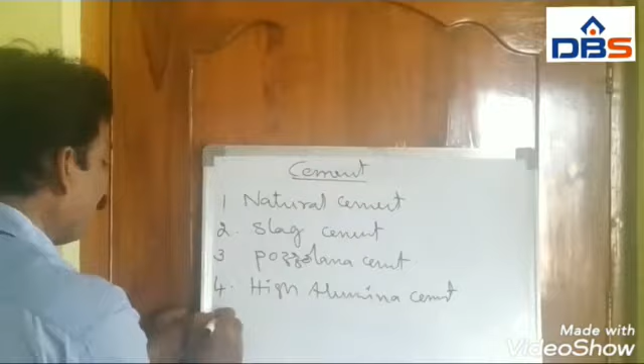One, natural cement. The second one, slag cement. Third, pozzolana cement. Fourth, high alumina cement. And fifth is Portland cement. These are the cement classifications.

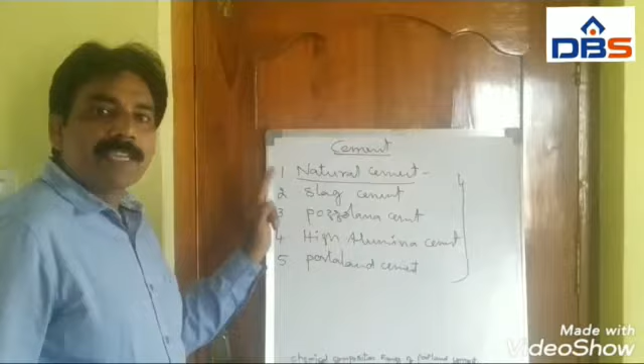First, natural cement. Natural cement is obtained by the furnace from naturally occurring limestone containing 20 to 40% of clay. The mixture is ground to produce natural cement. Natural cement is quick setting and low strength. That is natural cement.

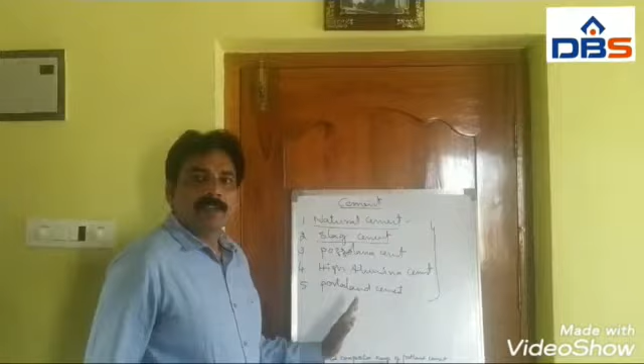Second, slag cement. Slag cement is produced by mixing blast furnace slag and hydrated lime, grinding to powder and mixing a small quantity of gypsum. Slag cement is slow setting and a low strength cement.

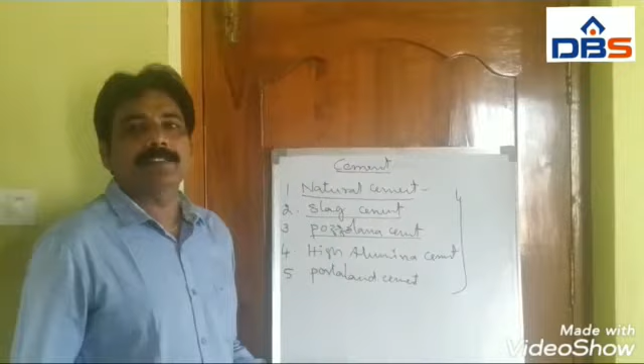Third, pozzolana cement. Pozzolana cement is prepared by mixing pozzolana and limestone and grinding the materials to produce pozzolana cement. Pozzolana cement is also slow setting and has the highest strength.

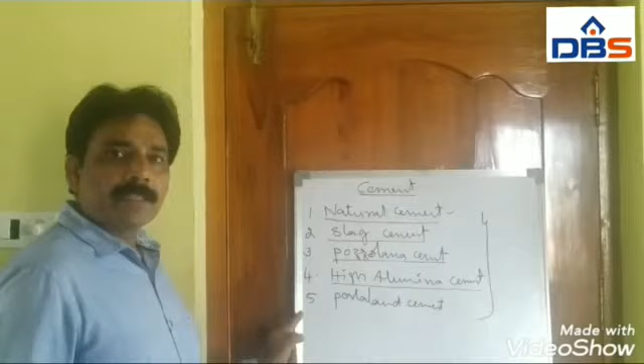Next, high alumina cement. High alumina cement is mainly calcium aluminates. It is prepared in a blast furnace by mixing limestone and bauxite at 1500 to 1600 degrees centigrade to produce a ground powder, mixed with 2 or 3% gypsum, called high alumina cement.

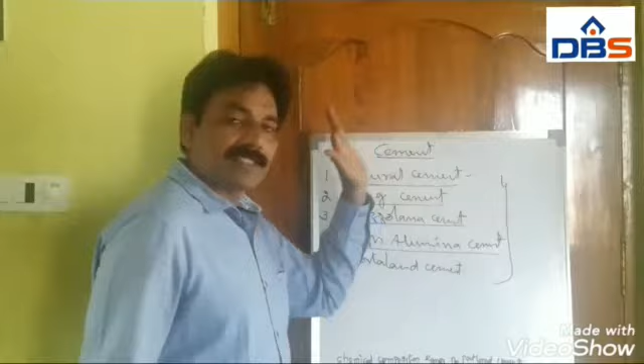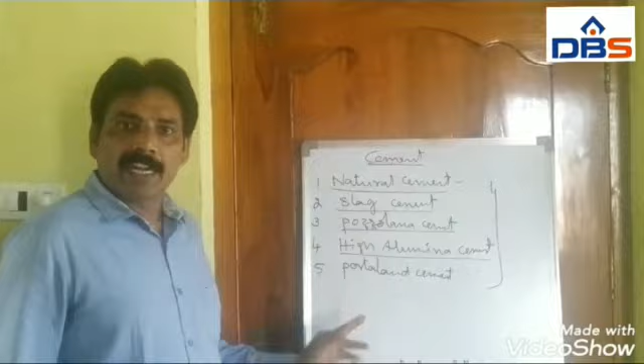High alumina cement is quick setting and high strength. It is a very strong cement and resistant to seawater and sulphate water. It is used in the construction of reservoirs and bridges.

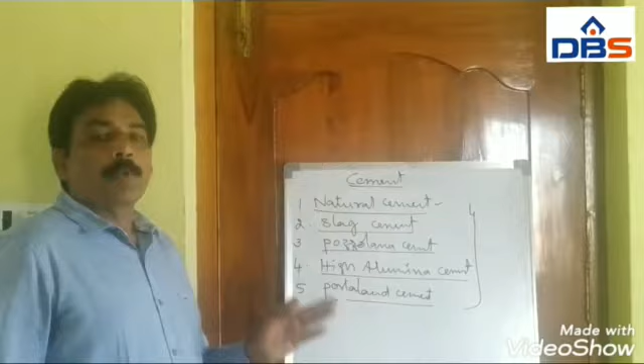The last one is Portland cement. Portland cement is prepared by mixing calcareous materials like lime and argillaceous materials like clay to produce a powder containing calcium silicates and aluminum silicates. Portland cement is also slow setting, low strength material.

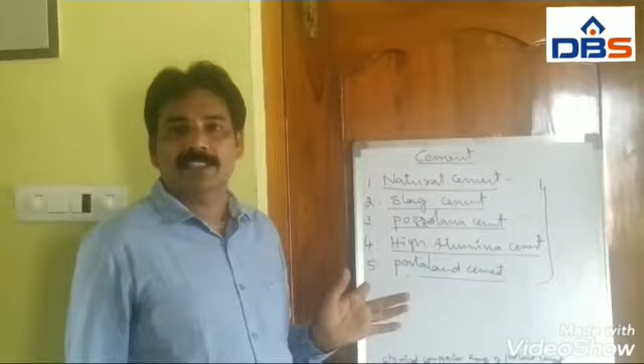These are the cement classifications: natural cement, slag cement, pozzolana cement, high alumina cement, and Portland cement. Of the five, at present high alumina cement is used as a very strong cement resistant to seawater and sulfur water. So these are the classifications of cement.

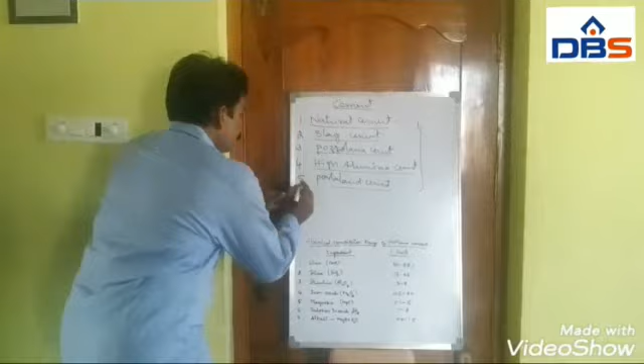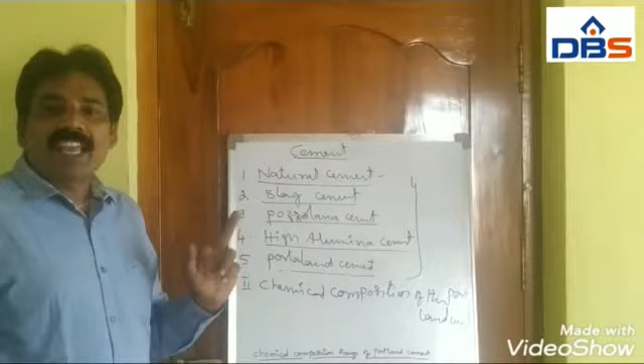Second is the chemical composition of Portland cement. Generally, Portland cement means a finely powdered mixture of calcium silicates and aluminum silicates. Portland cement is very useful in society. Portland cement's composition has different contents.

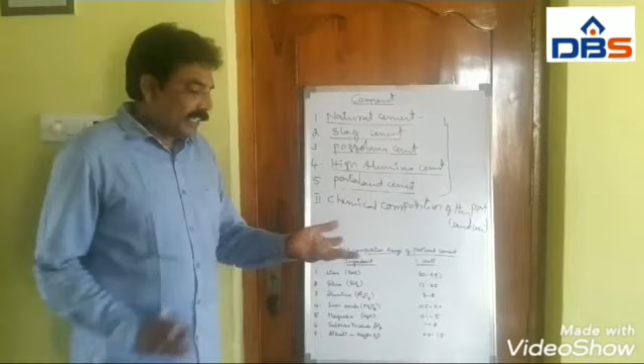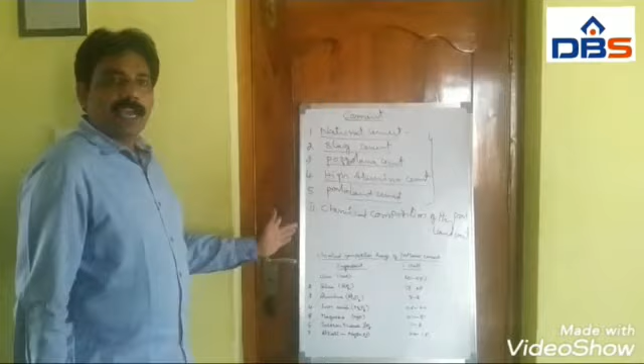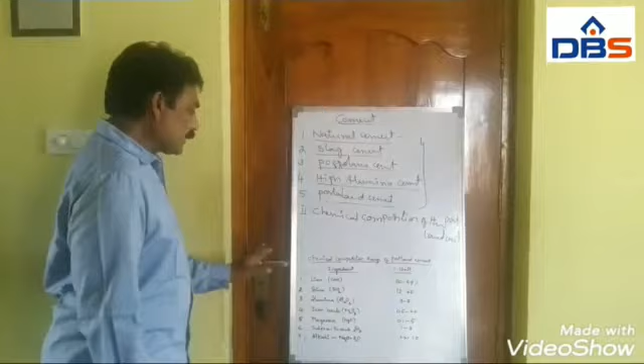The chemical composition range of Portland cement, ingredient by ingredient with percent limits: lime, calcium oxide, is 60 to 69%. Silica, silicon dioxide, SiO2, ranges 17 to 25%.

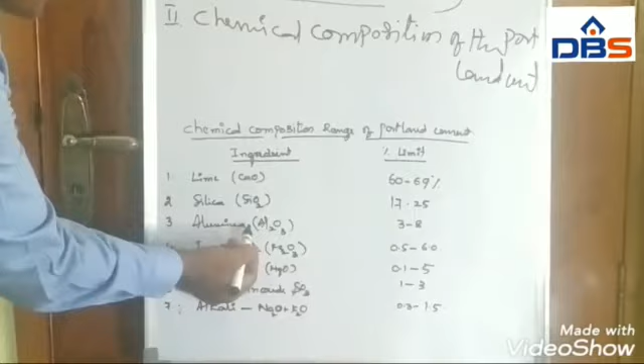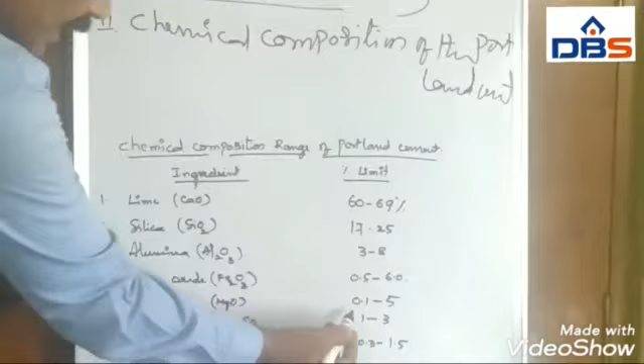Alumina, Al2O3, is 3 to 8%. Iron oxide, ferric oxide, Fe2O3, is 0.5 to 6%. Magnesium oxide, MgO, is 0.1 to 5%. And sulfur trioxide, SO3, is 1 to 3% in Portland cement.

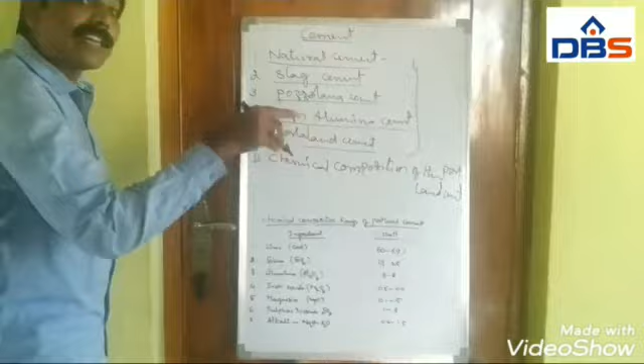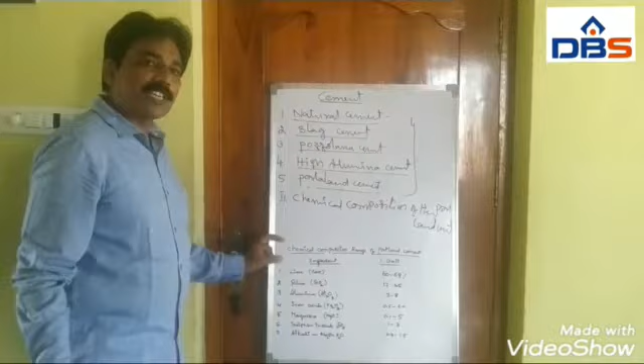Another is alkali, a product of alkali metals and alkaline earth metals, the combination of sodium oxide plus K2O, 0.3 to 1.5%. This composition gives Portland cement resistance to seawater and sulfur water. This is the most important composition of Portland cement.

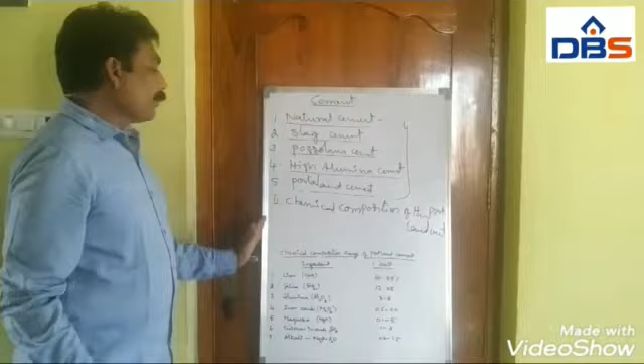It is Portland cement because, once setting and hardening, the cement is just like a stone. That is a property of stone. That is the chemical composition of Portland cement.

Manufacture of Portland cement. Portland cement is manufactured by two methods. One is the dry method, another one is the wet method. The dry method and wet method differ slightly: with water is the wet method, without water is the dry method.

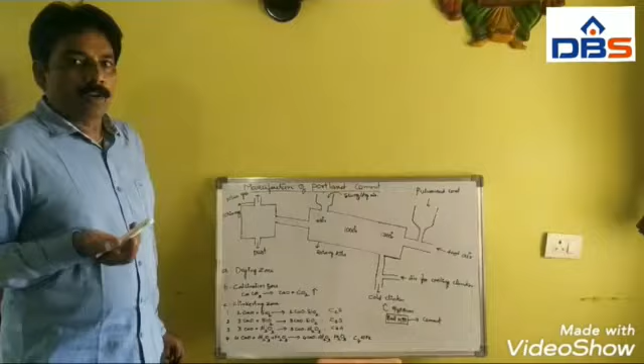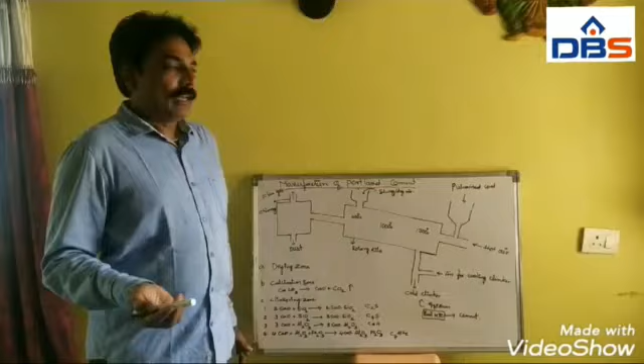Portland cement is manufactured from raw materials: first, calcareous material; second, argillaceous material; third, coal powder or fuel oils; and fourth, gypsum, CaSO4·2H2O. Next, the manufacture of Portland cement involves 4 steps: one is the raw material,

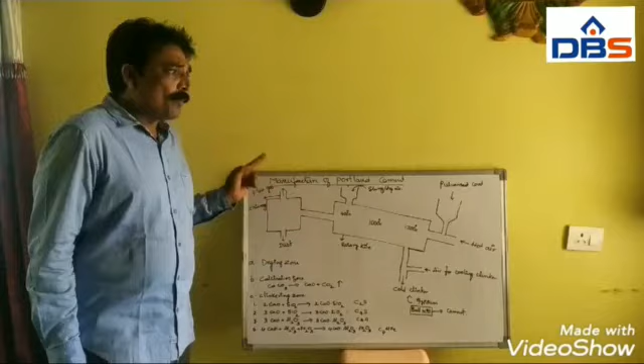second is grinding, third is burning, and fourth is packing. These are the 4 steps involved in the manufacture of Portland cement. So first, mixing of raw material. Mixing of raw material has 2 methods: the wet method or the dry method.

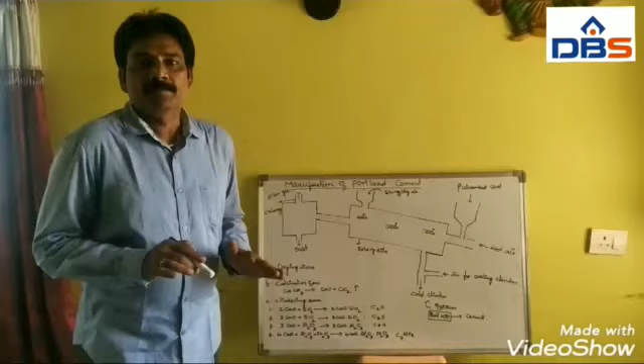In the dry method, limestone or argillaceous materials are crushed in crushing mills or ball mills to produce a dry powder. That is called the dry method. Next is the wet method: the calcareous or argillaceous materials are crushed by ball mills into powder and mixed with water to form a slurry.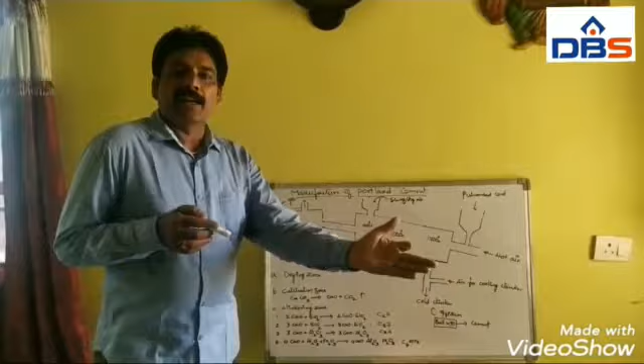So those are the 2 methods: the dry method produces a dry powder and the wet method produces a slurry. Next, the second step is burning. Burning is done in a rotary kiln, which is a steel cylinder of 2.5 to 3 meters diameter and 90 to 120 meters length.

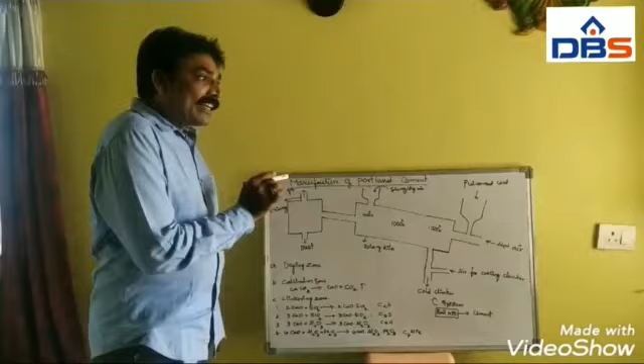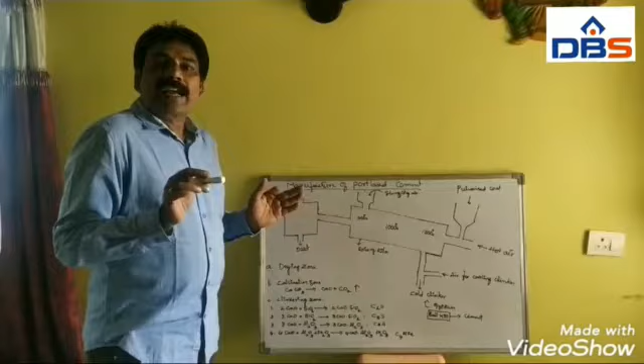The rotary kiln is lined inside with refractory bricks. Refractory bricks means a material that resists heat. The refractory bricks line the inside of the rotary kiln. At the same time, the rotary kiln is in a slightly inclined position.

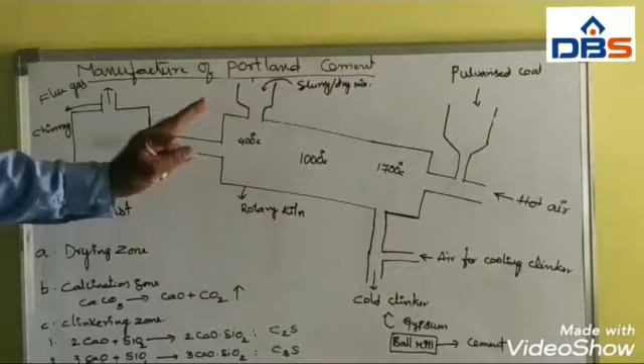The top of the rotary kiln is maintained at 400 degrees centigrade. Next, the center of the rotary kiln is maintained at 1000 degrees centigrade, and the bottom of the rotary kiln between 1500 to 1700 degrees centigrade.

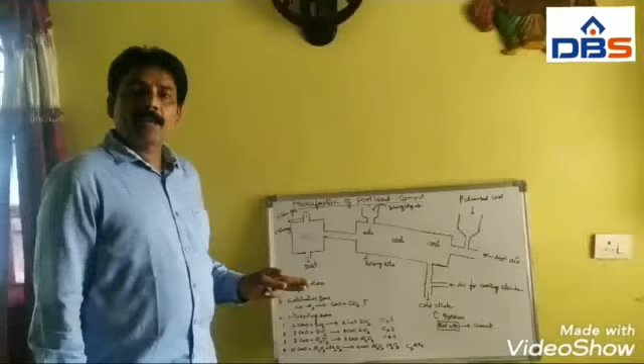The slurry produced by the wet method, or the powder produced by the dry method, passes through the top of the rotary kiln. The rotary kiln has 3 zones inside.

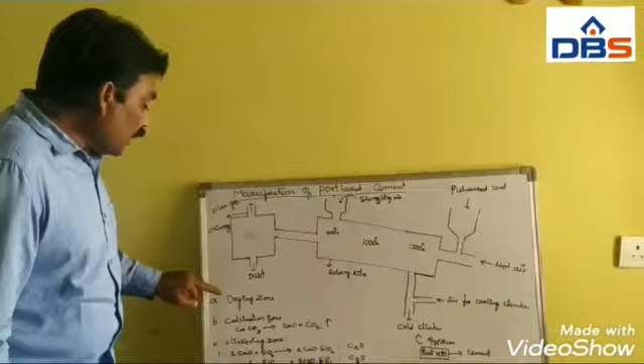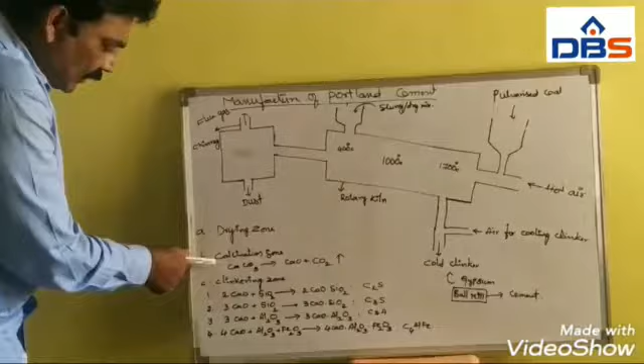One is the drying zone, second is the calcination zone, third is the clinkering zone. So 3 zones: drying zone, calcination zone, and clinkering zone. First, any raw material passes through the top of the rotary kiln. That is the first one, the drying zone.

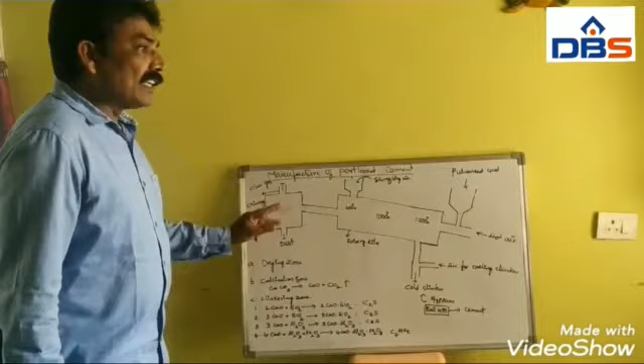That material gets dried at the top of the rotary kiln at about 400 degrees centigrade. Next, the center of the rotary kiln is maintained at 1000 degrees centigrade. The dry material decomposes to form lime and carbon dioxide. The equation is CaCO3 gives CaO plus CO2. That is the lime.

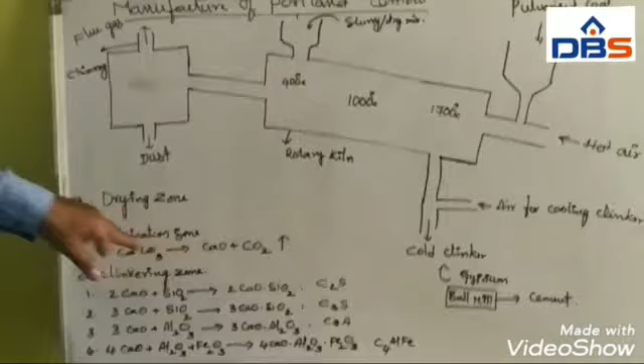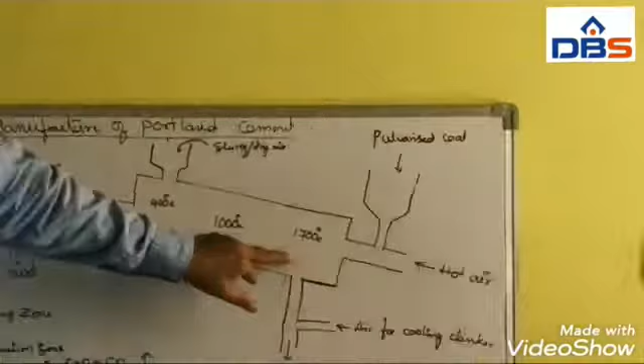Third is the clinkering zone. The bottom of the rotary kiln is maintained between 1500 to 1700 degrees centigrade. The limestone and clay react in the bottom of the rotary kiln to form calcium aluminates and calcium silicates.

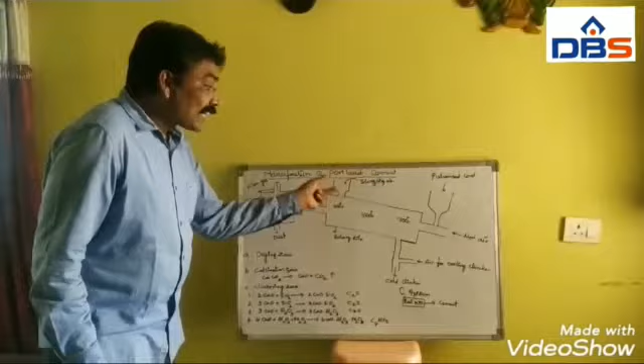The calcium silicates and calcium aluminates form hot, greyish stones called clinkers. Hot clinkers are produced at the bottom of the rotary kiln. These are the equations involved in the clinkering zone.

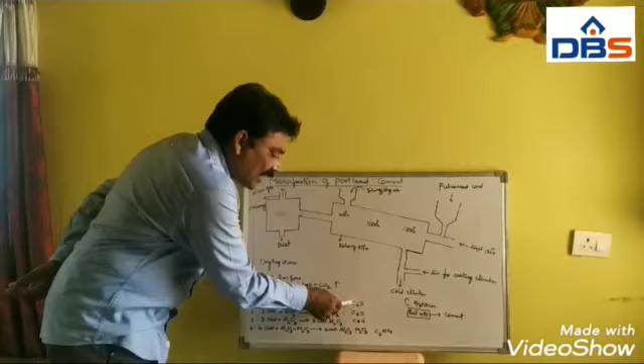2CaO plus SiO2 gives 2CaO·SiO2, dicalcium silicate. C2 means dicalcium, S means silicate. The next equation: 3CaO plus SiO2 gives 3CaO·SiO2, tricalcium silicate.

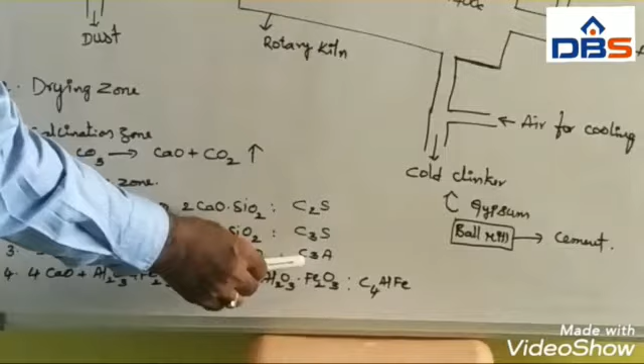Third equation: 3CaO plus Al2O3 gives 3CaO·Al2O3. That is tricalcium aluminate. A means aluminate. And the fourth equation, 4CaO.

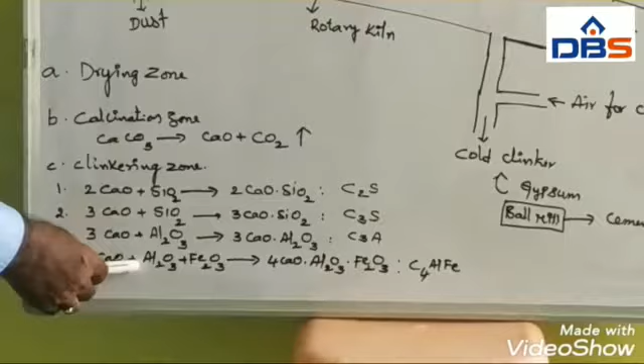CaO means lime. 4CaO plus Al2O3 plus Fe2O3, where Fe2O3 means ferric oxide, gives 4CaO·Al2O3·Fe2O3. That is tetracalcium aluminoferrite.

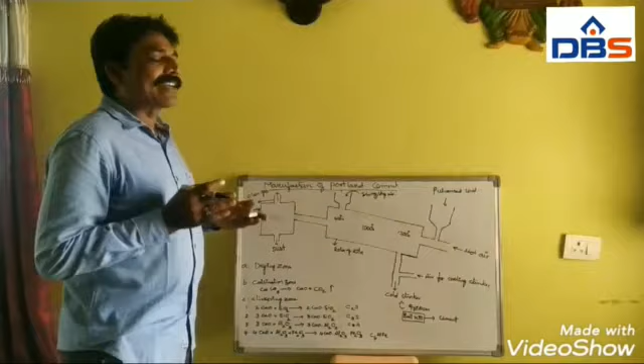These are hard greyish stone clinkers. The hot clinker is converted to cool clinker by passing cool air over it. So it forms a cool clinker.

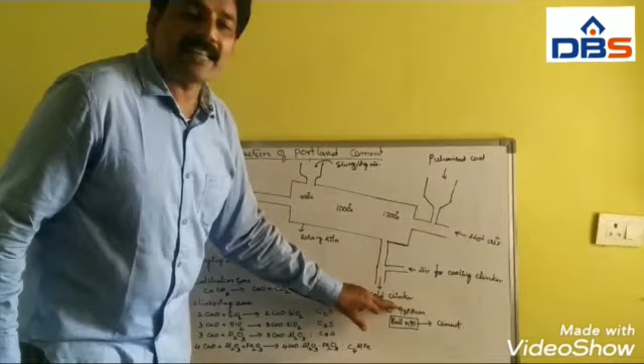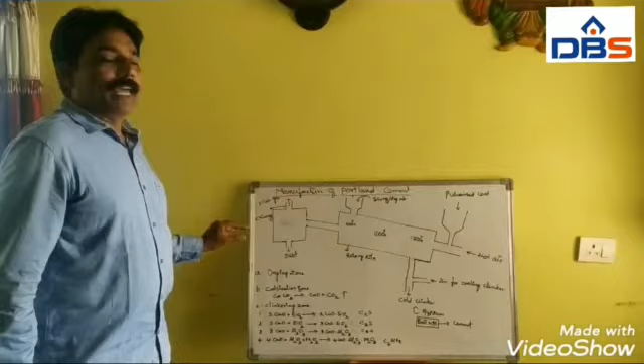That cold clinker, with the addition of gypsum, is crushed or ground by ball mills to form cement. That is the grinding method. Once again, the manufacture of Portland cement: the wet process produces a slurry, the dry process produces a dry mix. The slurry or dry mix passes through the rotary kiln.

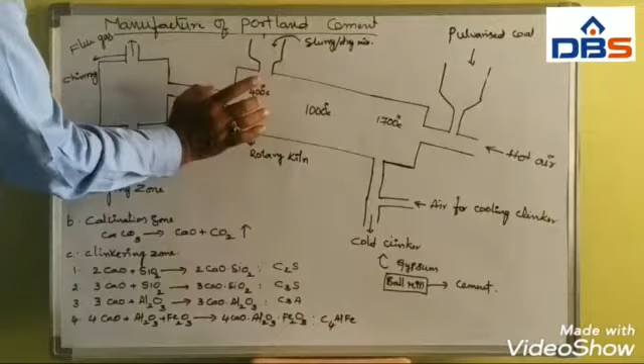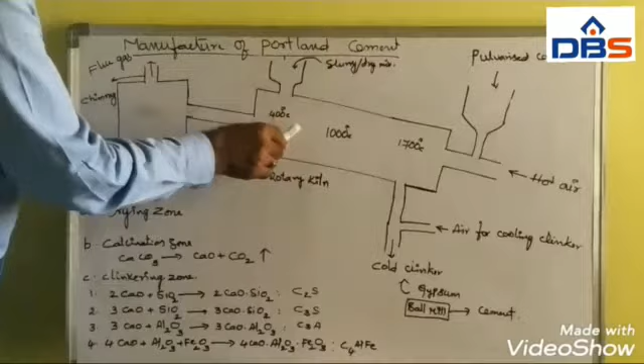The first part of the rotary kiln is maintained at 400 degrees centigrade. The slurry or dry mix gets dried; it is the drying zone. Next one is the calcination zone. The center of the rotary kiln is maintained at 1000 degrees centigrade. The dried mix decomposes to form lime, CaO, and carbon dioxide. That is the equation: CaCO3 gives CaO plus CO2.

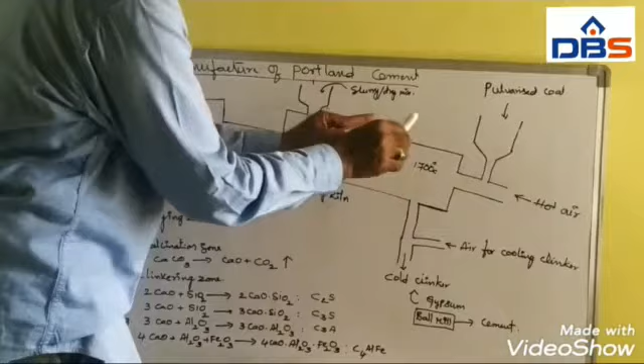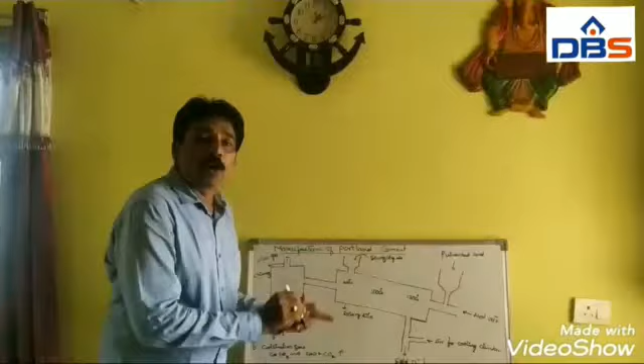The next, bottom part of the rotary kiln is maintained between 1500 and 1700 degrees centigrade. There clay and lime react to form calcium silicates and calcium aluminates, hard greyish stones. That is called clinker. That clinker is a hot clinker. The hot clinker is converted to cool clinker by passing cooling air.

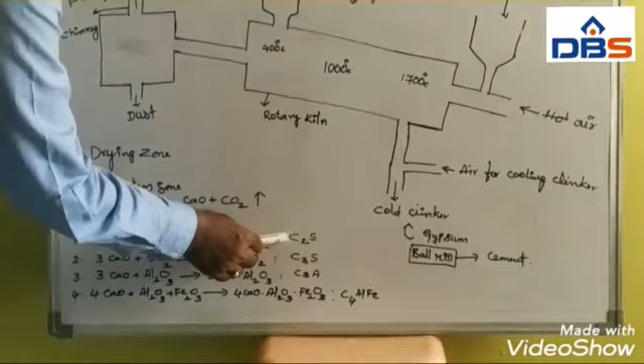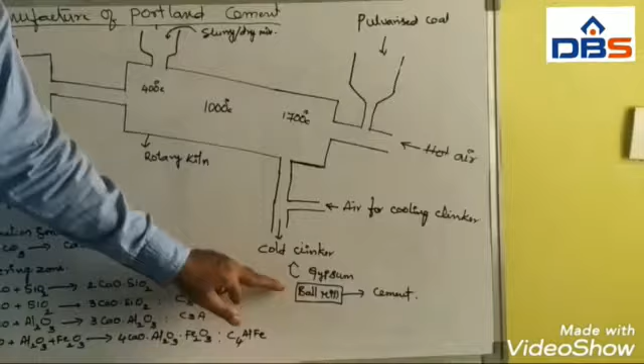Next, these are the equations of the clinkering zone, 4 equations: dicalcium silicates, tricalcium silicates, tricalcium aluminates, and tetracalcium aluminoferrates. That is the hot clinker, then cold clinker. Third one is the grinding method. Cold clinker is ground in ball mills with addition of 2 or 3% gypsum to form cement. That is called Portland cement.

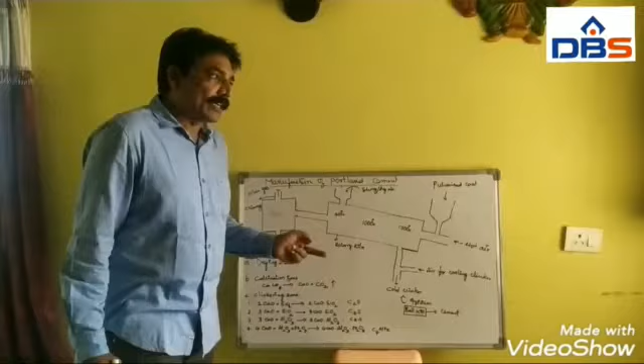The fourth one is packing. Packing means the Portland cement is stored in godowns and packed by automatic machinery. That completes the manufacture of Portland cement. This is very important for main examinations. So this is the manufacture of Portland cement.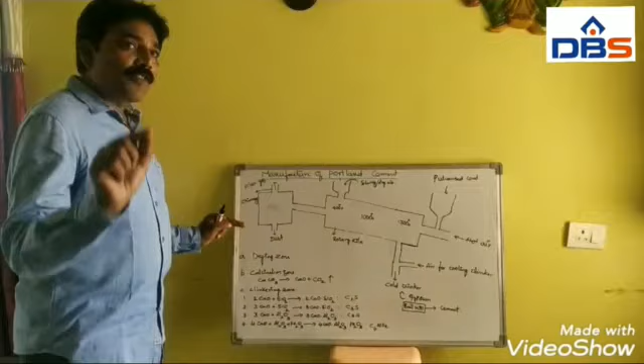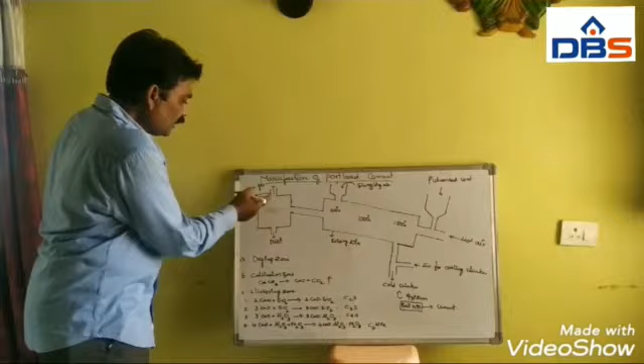Manufacture of Portland cement involves 4 steps: mixing of raw materials, burning, grinding, and packing. This one is the chimney. The chimney releases flue gas and dust particles also. This is the completion of the Portland cement process.

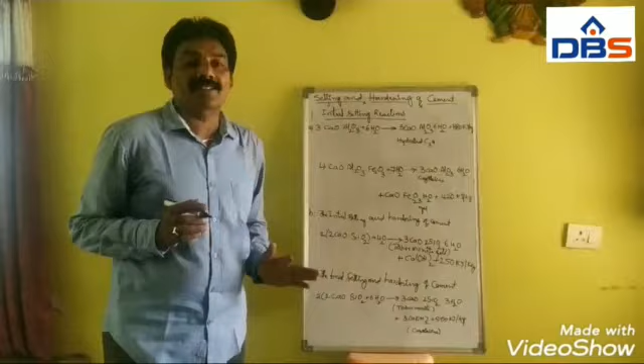Setting and hardening of cement. Portland cement, on mixing with water, is converted to a plastic mass called cement paste. This process is called setting and hardening of cement. What is meant by setting? Setting is stiffening of the original plastic mass due to gel formation. Once again, setting: stiffening of the original plastic mass due to gel formation is called setting.

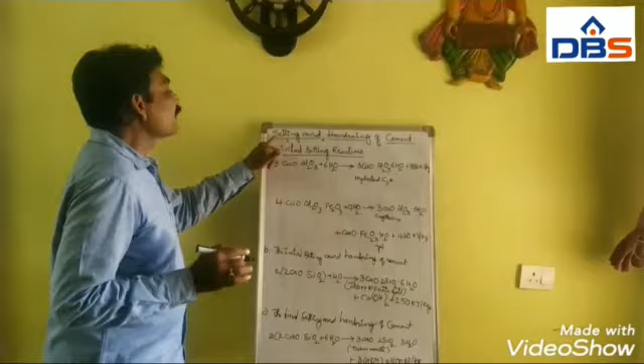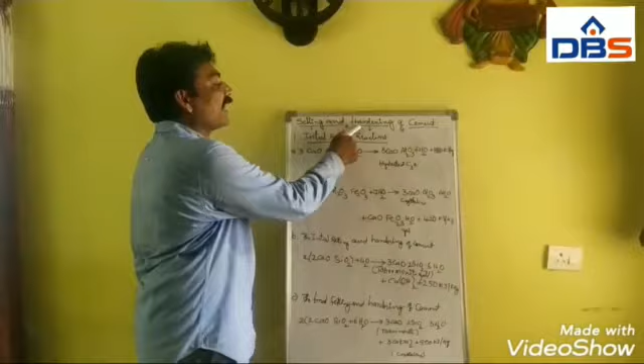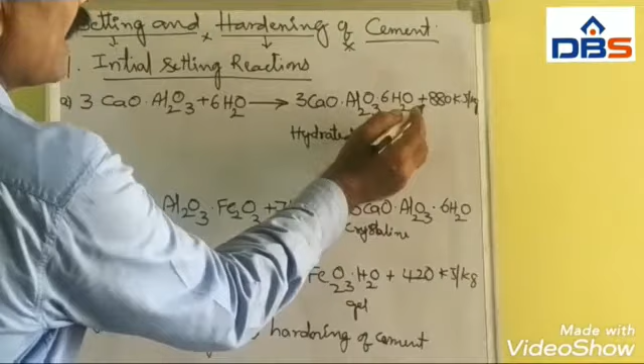Next one is hardening. Hardening means development of strength due to crystallization. Setting and hardening involve the following reactions one by one. First, the initial setting reaction: 3CaO·Al2O3 plus 6H2O gives 3CaO·Al2O3·6H2O plus 880 kilojoules per kg. This is called hydrated tricalcium aluminate. That is the initial setting of the cement.

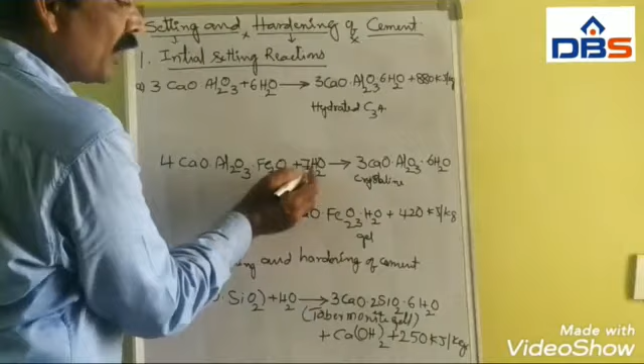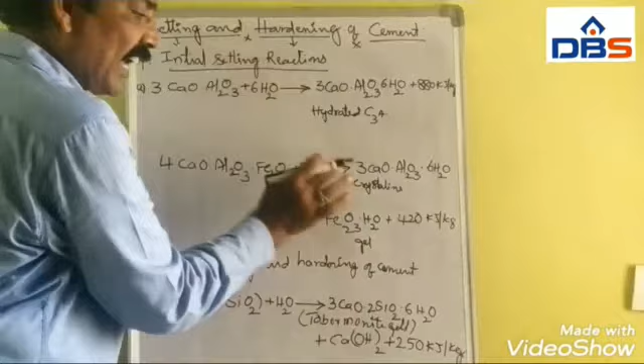Second one: 4CaO·Al2O3·Fe2O3 plus 7H2O gives 3CaO·Al2O3·6H2O, which is crystalline and slowly proceeds from setting to hardening, plus CaO·Fe2O3·H2O plus 420 kilojoules per kg. This is the gel. Gel formation is setting; crystallization is hardening. Slowly the plastic mass hardens. The second one, the initial setting and hardening of cement.

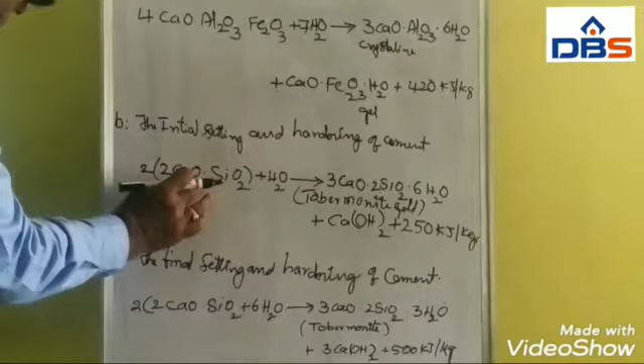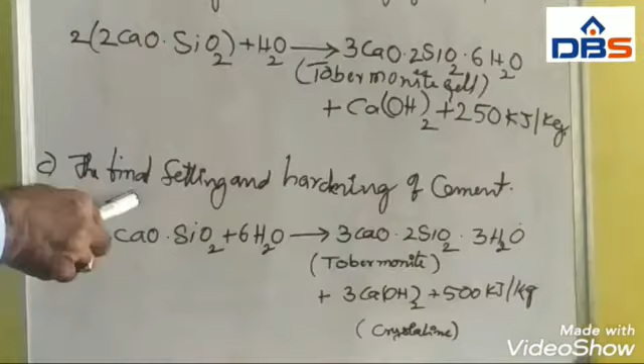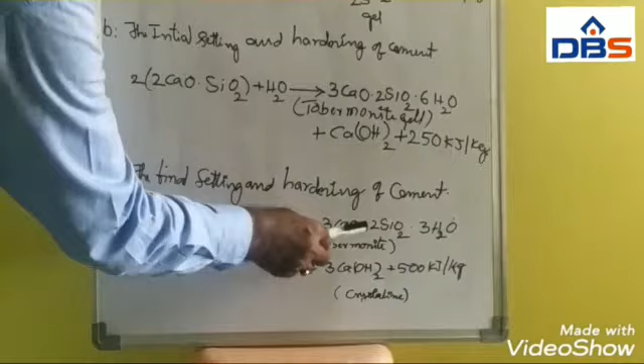2CaO·SiO2 plus H2O gives 3CaO·2SiO2·6H2O, called tobermorite gel, plus Ca(OH)2 plus 250 kilojoules per kg. This is the crystallization. Next is the final setting and hardening of cement: 2CaO·SiO2 plus 6H2O gives 3CaO·2SiO2·3H2O, the tobermorite gel, plus 3Ca(OH)2, calcium hydroxide, plus 500 kilojoules per kg. This is the crystalline, solid product. These are the internal reactions of setting and hardening of cement.

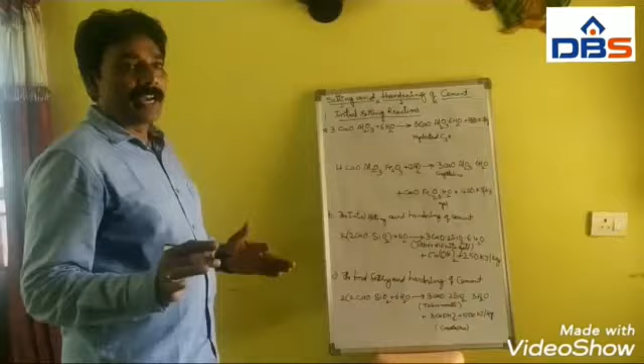So these are the setting reactions: first gel formation, second crystalline formation, finally tobermorite gel formation and crystallization. That is the final setting and hardening. The duration of setting and hardening of cement is 28 days. After 28 days the cement becomes like a very strong stone. That is called setting and hardening of cement.